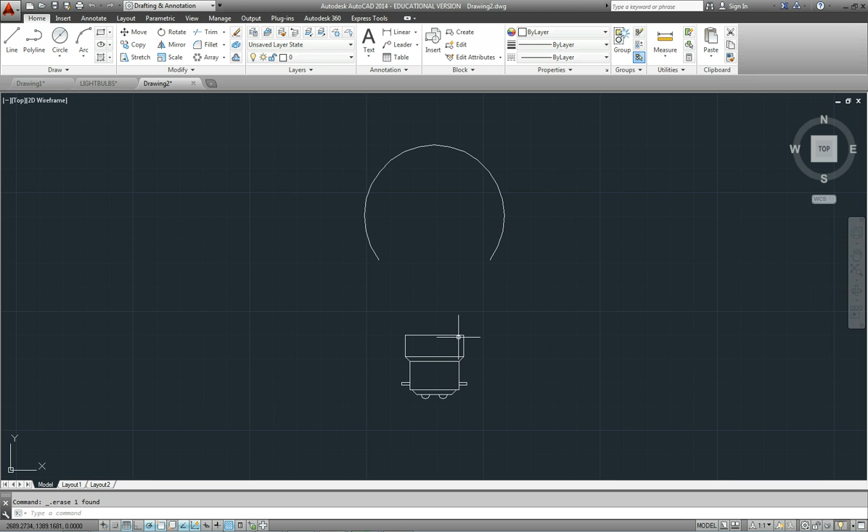So I've got one that's partially drawn here that I prepared earlier, and let's just do that part. So first of all, we know that the arc passes through this point here, and we know that it's a radius of 10, so we can sit on that point and we can draw a circle with a radius of 10. I've got diameter here, so I'll just go diameter 20. Okay. So the center of the arc is somewhere on this circle.

Now I'll just draw in the lines. Let's draw in a quick center line here, which we will offset to get our vertical sides. So they're 31 apart. I'll just bring the drawing over. So we've got 31 across here. So we'll just put in these vertical lines here. So we're going to offset half of 31, which would be 15.5.

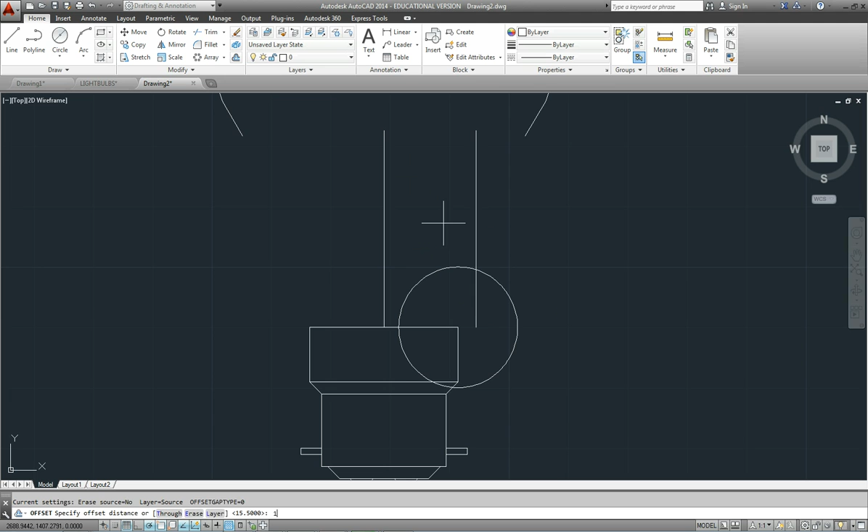Over that side. Now we know that our arc, the arc that we're looking for, is tangential to this line. That means the center of it must be 10 millimeters away from that line. So if we offset that line a distance of 10, our center must be somewhere on that line. We've already said it's somewhere on that circle, so that has to be our center there.

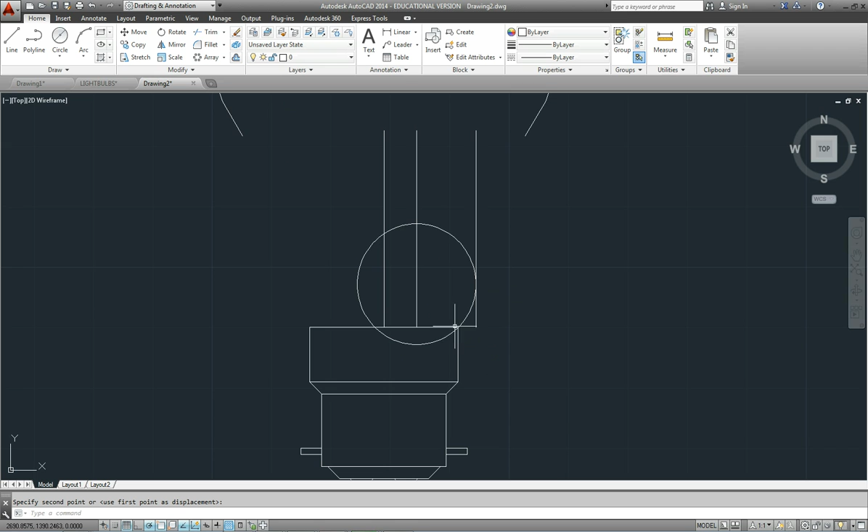Let's reuse this circle. Let's move it. We'll just pick it up on the center, and let's move the center to there, and there's our arc. It passes through that point. It's tangential to that line there. Trim it up.

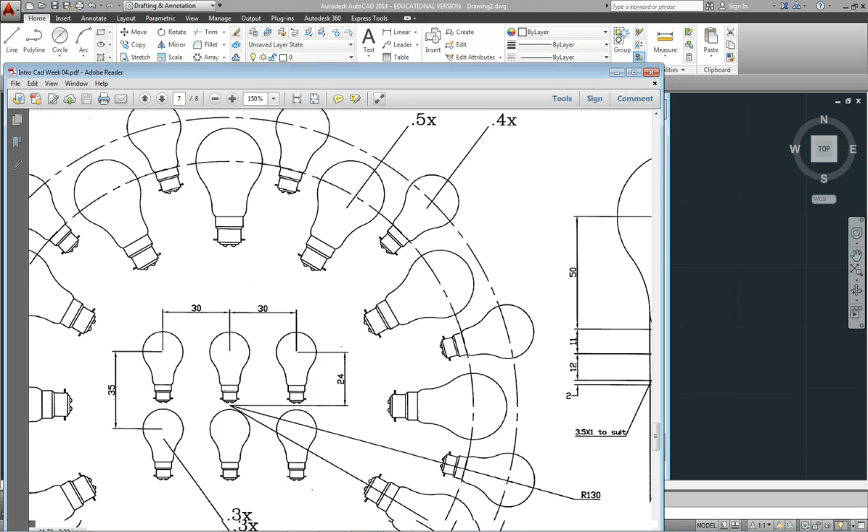Okay, we don't need those, and we need to drop in a fillet in here. We'll just have a look what size that was. So it's a radius of 40. So let's see if we can do it with a fillet. Radius 40 between there and there. And there it is, nicely trimmed back.

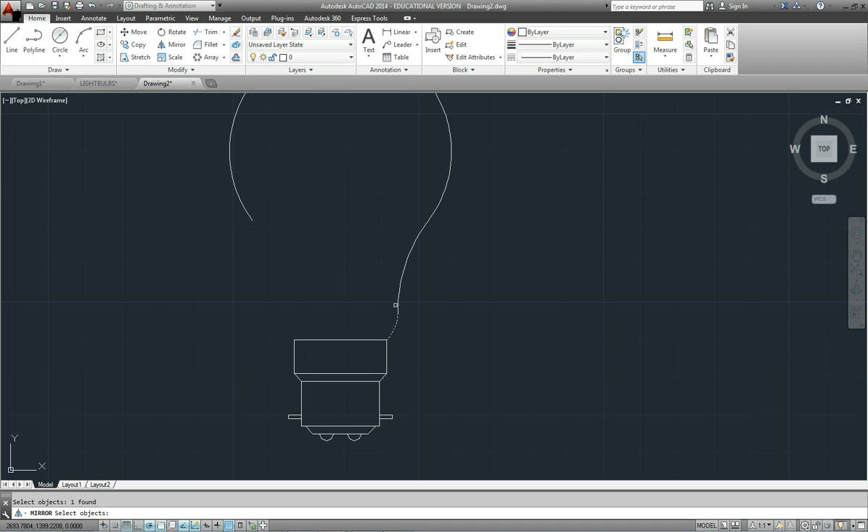We can do a mirror of those objects. It looks like it's pretty well taken out the line. There's not much of that line left. There's actually a bit of vertical line there. And we'll do a mirror about the center line, keep the previous part, and there it is finished.